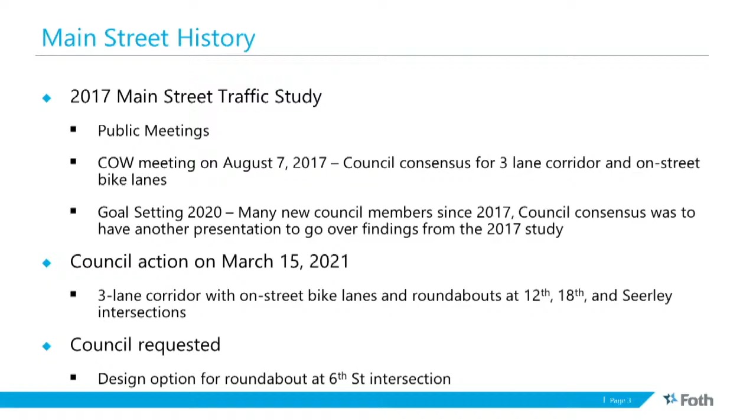A little bit of history: in 2017, the city contracted with a consultant named Snyder and Associates to perform an overall traffic corridor study, basically from 6th Street south to Seerley Boulevard. Part of that process required individual stakeholder meetings with businesses and residents, and we had multiple public informational meetings as well. Ultimately, in August of 2017, we received direction from council to move forward with a 3-lane corridor and on-street bike accommodations.

At goal setting last year, this was a topic of discussion with many new council members since the 2017 presentation. Some of the council consensus was to hear the findings of the report and the information presented at that 2017 meeting.

So this last spring, I had Snyder and Associates come back two different times. The first time was to provide this current council with information from the 2017 study, and out of that presentation there were a few follow-up questions. The consultant then came back on March 15th and provided that information to you folks.

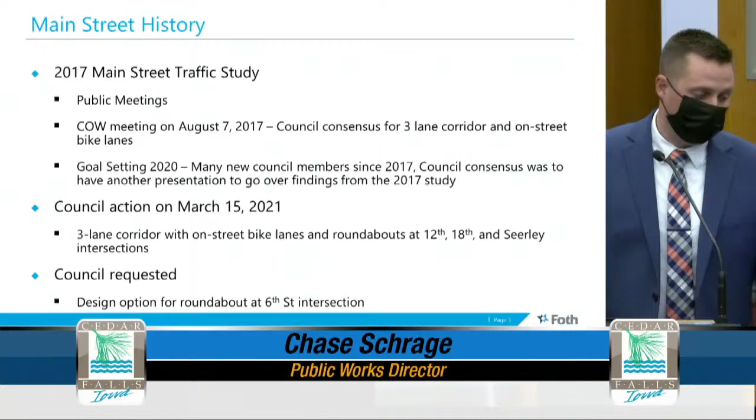Out of the March 15th meeting, staff was left with direction to move forward in design with the 3-lane corridor, on-street bike accommodations, and roundabouts at 12th, 18th, and Seerley. Part of that, council requested a design alternative for the 6th Street intersection, comparing a traffic signal versus a roundabout. With that, Aaron Munzinga is here with Foth Infrastructure to go through those details with you.

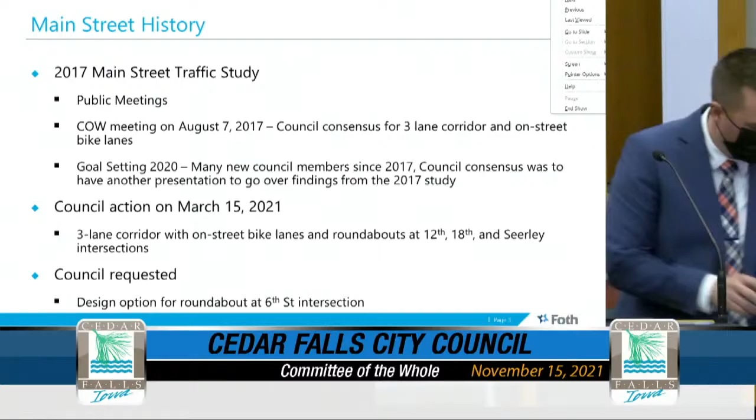Thank you, Mr. Munzinga. The floor is yours. Well, thank you, it's great to be here. I know some of you folks I've met in the past, some I haven't—so this is just what I look like. Appreciate the time here this evening. As Chase said, there are a couple items here we'd like to go through.

The first item, I'll talk a little bit about the intersection there at 6th Street, and then the second item, we'll get into some of the potential right-of-way impacts for the corridor. As Chase said, there's been a lot of work already done on the Main Street corridor, as recently as the last meeting back in March. The next step was for us to come back and look at the design option for a roundabout at the 6th Street intersection, which is what we're going to tackle first.

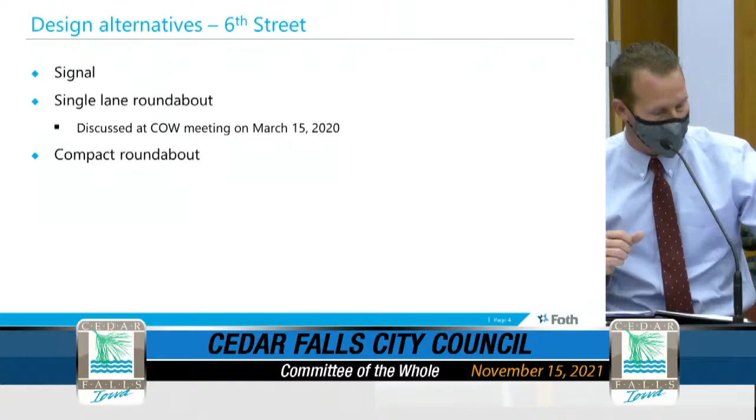One of the options we looked at was a signal, and then we also did a couple different iterations looking at fitting a roundabout into that intersection—finding the best way to do that while balancing feedback from the previous meeting about how much right-of-way disruption a traditional-sized roundabout was causing.

So really, to summarize, the biggest pros with this option are there's really no right-of-way impact and a bit of a smaller footprint in terms of construction limits we need to have. On the flip side, one thing we would need to do with this option is replace the traffic signal itself in addition to just the intersection work.

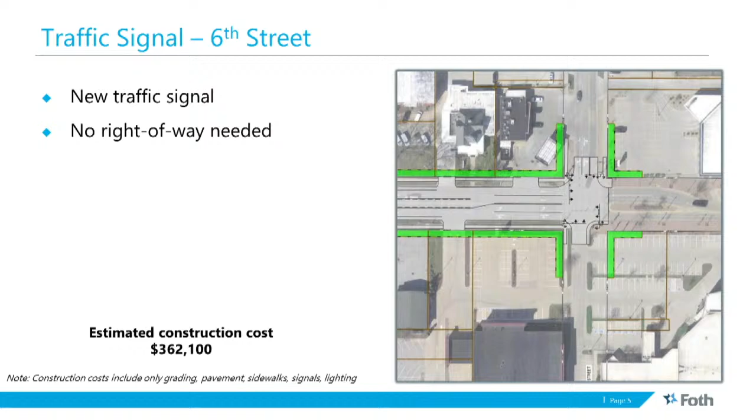So the biggest benefits are the same benefits you have with any roundabout intersection: improved safety and improved traffic operations.

The other element with the roundabout is the impact to the library parking lot and the estimated loss of stalls that option would have. We haven't gotten far enough in our design—there's probably some things we can fine tune—but to be conservative, we're estimating somewhere in the 10 to 13 stall range of potential stalls lost.

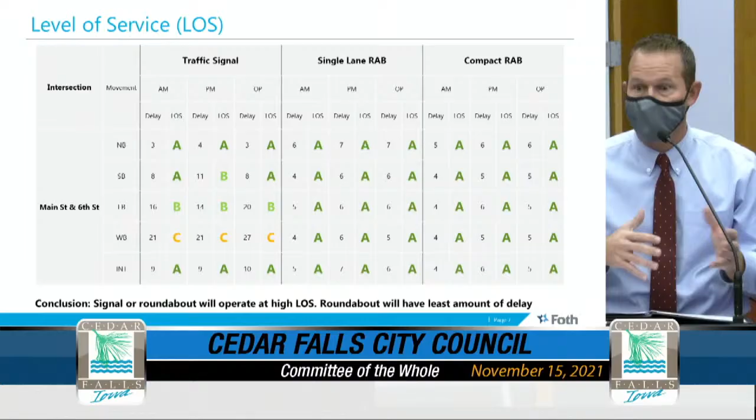The DOT, at a minimum, likes their intersections to operate no lower than a level of service D. In our previous work here at the city, we usually try to keep it at C or higher, for the movements themselves as well as the intersection as a whole. So, whether you did a signal or a roundabout, the traffic is actually going to operate just fine with either option. The roundabout would just operate at a little bit higher level.

You can kind of see that here if you look at the slide, on the far left under the traffic signal, you'll see we have some movements at level of service C and level of service B, whereas from the roundabout option—the one in the middle and the one on the far right, let's focus on the far right since that's the compact design—we're going to have no lower level of service than A with that option.

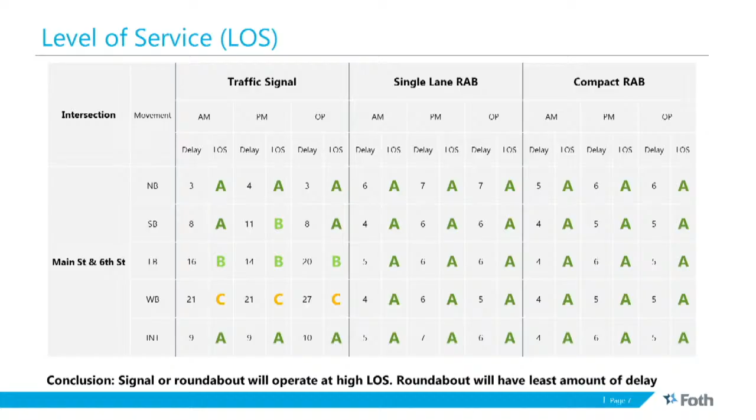So the next thing we can look at is what we call our life cycle cost comparison. To be consistent, this is pretty much the same methodology you folks have seen in some previous work on Main Street, and it's also very similar to what we did on previous projects, more specifically University Avenue.

If you compare the roundabout to the traffic signal—this comparison is on an annual basis, but think of it over the next 20 years, which is the design life we look at for projects like this—essentially what you're going to see is about $146,000 of what we'd call user cost savings for the roundabout compared to the signal. Over the next 20 years, that's a benefit of about $2.9 million for the roundabout.

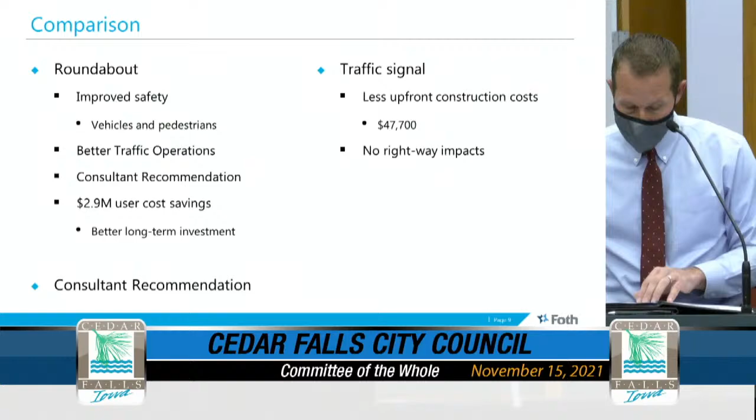So with that, I'd like to pause and see if there are any questions I can address before I tackle the next item on the agenda.

Can you speak about the differences between the larger roundabouts you'd see in other areas versus this smaller one? Are there any additional concerns for crashes or reaction times compared with a larger roundabout? Not in this location, so we feel comfortable. It's just slightly smaller here—to give you a scale, the roundabout you see up there has about a 90-foot diameter. Traditional ones are usually around 100-plus feet, and of course for larger intersections with multiple lanes you get significantly larger, 160 feet, et cetera. In this location, looking at the traffic, we already have low speeds, so it's an ideal location for what we'd call a compact roundabout, a little bit smaller.

Okay, thank you. You're welcome. Other questions from council? Councilor deBuhr?

I never did hear what the accident statistics were for that intersection—can someone tell me what they are? Yeah, actually in the last decade here we've had about one accident per year at this intersection, and of the corridor, it actually has the highest percentage of injury accidents. So you see that reflected in the user cost summary I shared.

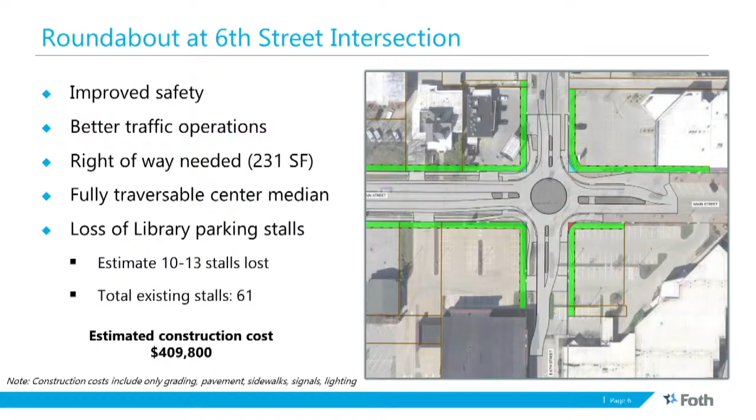Thank you. So I think there was three things, let me address them all. The first was, the green, our temporary easement - the stalls I identified, kind of 10 to 13, are impacted regardless of the temporary easement. Where a lot of that impact comes from is, part of it is just obviously we need a little extra width in there with the roundabout option. And then the other part came in just looking at the circulation here within the library and how folks get in and out of there.

Could the angle parking be an option? Definitely. And let me be clear too, we haven't really gotten into fine tuning this, and I would say that, at least at this stage, we're taking the approach to probably be as conservative as we can. I think it's similar to how we handled University Avenue - we're going to try to identify probably the worst case scenario, and then try to dial that back.

But we do also want to make sure folks know, there's certainly going to be an impact to some stalls. And then the last part of the question, if I caught it, was, in addition to the angle parking, we could also look at sliding that - I know there's some fine tuning we can look at here that could maybe help us save one or two of the stalls. But like I said, we just haven't gotten far enough into design, so I hate to put a number to it until we can move forward with that design, in case that's the way the council wants to progress.

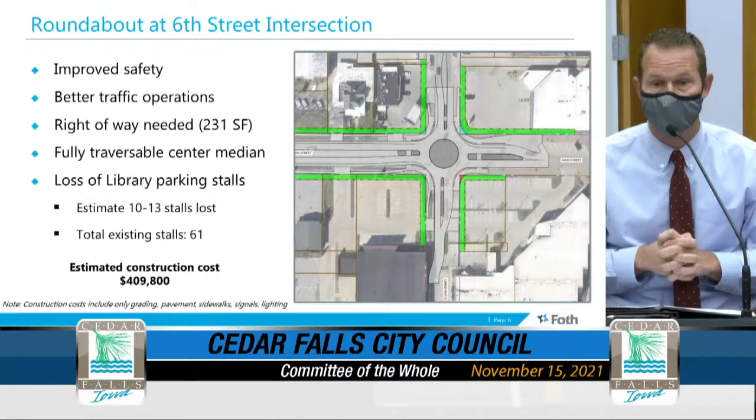So the second part here of our presentation, I'm going to give the council and mayor an overview of the potential right-of-way impacts. Again, this is just looking at our concept. And I just want to make sure everybody's clear - our goal here at this point is to lean towards being a little bit more conservative, knowing that we can always dial things back. So if there's certain areas we're a little unsure about, we've tended to identify that as an impact.

So the first thing is, you'll see a couple different colored areas up there. There's the lighter blue areas you see in the slide deck, and in the information included with the council packet, that shows the areas that are going to be a permanent acquisition, either from a total parcel take or some of the strip takings we need. The green areas, as I mentioned a few minutes ago, is just temporary construction easement. That's something we'll need on both sides of the corridor, all the way up and down, to be able to build the project. But of course, that's not a permanent acquisition.

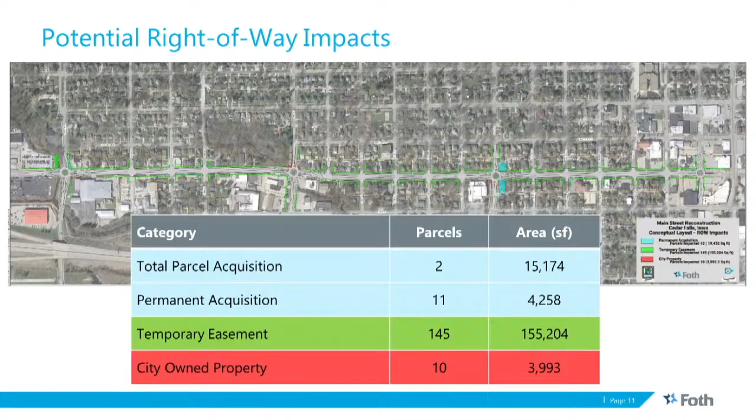So I'm going to start here with 6th Street, and I just want to be clear that we've not made any decision on this intersection, whether it's going to be a signal or a roundabout. I'm just showing the roundabout option because that option has right-of-way impact and the signal does not.

Again, this is a little bit of a repeat, but just to be consistent, when we look at the intersection here itself, you can kind of see that we've got some small right-of-way impacts at 3 of the corners, like we had talked about a few moments ago.

Now, the next area we want to look at is 12th Street, and you folks will probably see a theme here. Our right-of-way impacts are, for the most part, concentrated at the 4 intersections. At the intersection at 12th Street, this is certainly the intersection where we've got the most impact.

You can see that we've got total acquisitions identified for the property in the northwest and northeast quadrants, as well as some smaller strip takings in 2 other parcels here at this intersection. We've tried to take advantage of the city-owned property the best that we can.

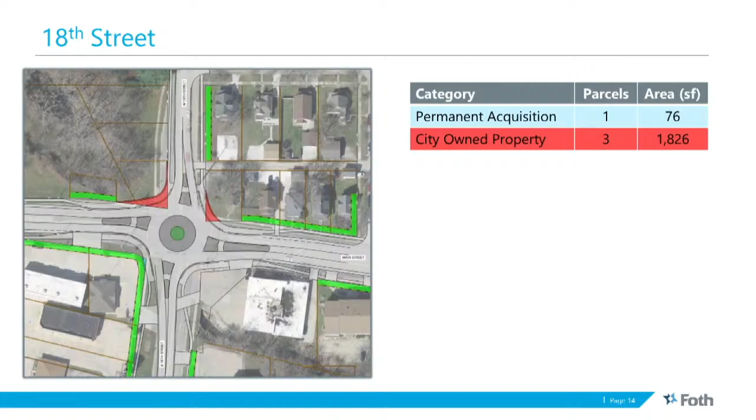Now, this is the only area really outside of the intersections where we need some right-of-way. Between 20th and 21st, as you can see, we just need a strip in here, and really this is going to help infill with the sidewalk going in there. That's primarily what this taking would be for.

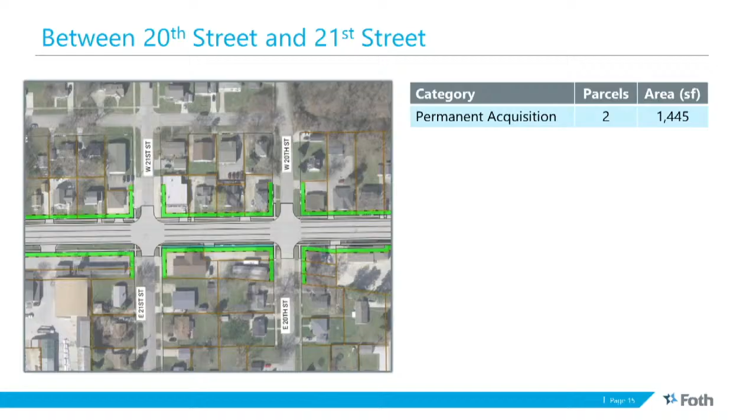And then finally, here at Seerley Boulevard—now, this has some similarities to 12th Street in the sense where we did look at moving this a number of different times. We were trying to balance that impact to the gas station with some of the properties to the south. Right now, we've got this as far south as we think we can.

Again, if we move it any further to the south, we kind of get into that similar situation where we're saving one impact but moving it somewhere else. And the further south we get, it also affects the design of the box culvert, or how we're going to be handling the box culvert in this location.

So to summarize here, the only difference between this slide and the first slide I showed is we did assign some order of magnitude costs to the right-of-way impacts. For the acquisitions, we've just used the valuation currently provided by the county, so just as a starting point.

And then for the strip takings and the temporary easements, we've just used what we'd consider current market rates for those. For the permanent strip takings, we're using $15 a square foot, and for the temporary easements, we're using $1 a square foot. You can see the square footages there for each category, and of course we have not put a dollar amount to the city-owned property.

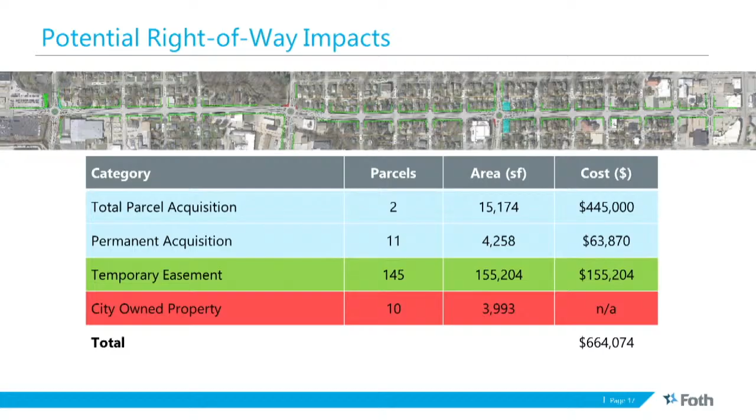So, before I open up for questions, just wanted to give an update here on the schedule. Just a couple things to add, the progress that has been made.

We have submitted the project for a grant from the Traffic Safety Improvement Program through the DOT. That was submitted back in October, and we're supposed to find out sometime towards the end of the year.

We have also walked the corridor, so city staff and I have visited with just about all the business owners along the corridor, to let folks put some faces to names and provide an update on where things are at and where things are going. That's one of the first steps in the public engagement.

As you all know, the city's got some federal funds, with the first round in fiscal year 23. So to meet that schedule, we want to get the project let in December of next year. Working backwards from that, we really want to get going on the right-of-way side of things, since that process can sometimes take longer, usually 8 to 12 months. That's the next step, accelerating that part of the project.

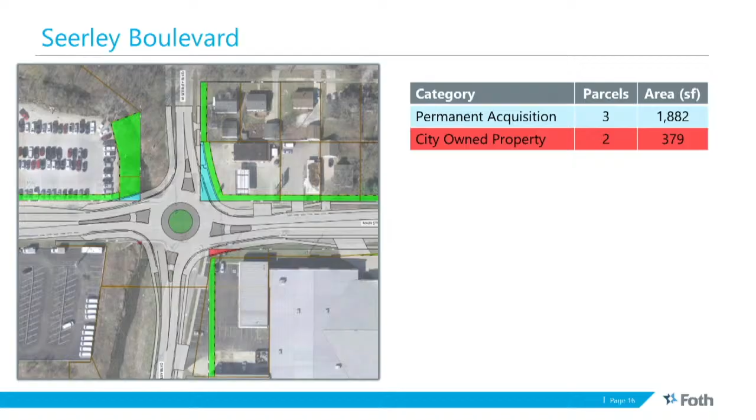Councilor Harding: On the permanent acquisitions on 12th, with the property owners there, do we have any idea—have we talked to them where they're at? No, I have not had any contact with either one of those property owners at this point.

Has staff had any contact with them? No, we haven't at this time, but until we get into the final design and actually know that we need to acquire the property, we hate to move forward in that direction until we know that—we only need a 5-foot permanent easement and don't need the total take.

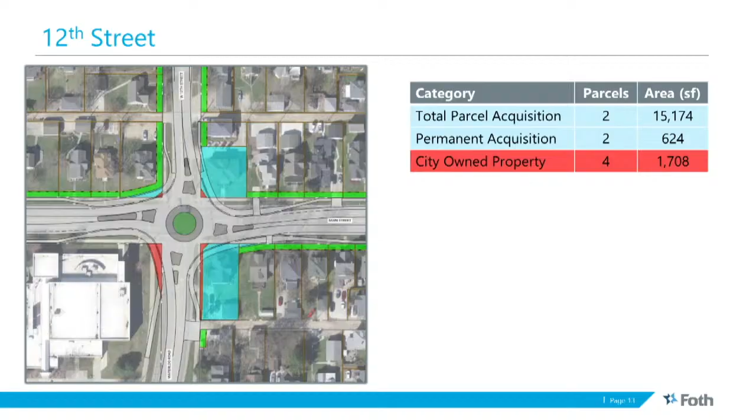So what time frame do you expect to have that information? Coming out of this, we'll really ramp up our final design activities, where we get into the details. You're looking at towards the end of the year, early part of next year, when we'd be able to know exactly where we're looking at for some of these impacts. Okay, thank you.

Councilor Harding: So I understand these are worst-case scenarios right now, which we could try to minimize. But what happens if we move ahead with the roundabout and those property owners don't want to sell? What situation do we find ourselves in if we haven't approached them about telling them it's a possibility? You want me to handle that one? I'm just curious how the process goes.

So in that case, there's what's called condemnation. There's a rigorous process laid out by the federal government that we follow in cases like this—certain steps in terms of communication, and a period of negotiation. But if you got to the point where you couldn't reach a negotiated agreement, then you can go into condemnation, which allows the city to acquire the property, and it becomes a discussion and negotiation about how much that compensation is. We usually do everything we can to avoid that.

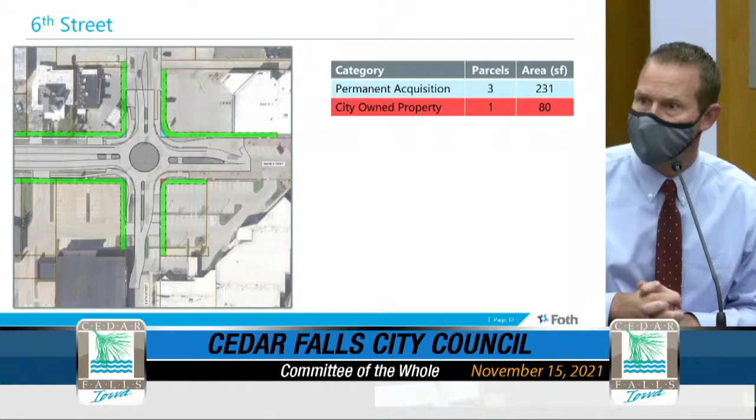Mayor, at 6th Street, have we had any discussions with First National Bank about parking, shared parking, or doing something for overflow at the library there? Have we ever had a conversation with them? I don't love the idea of losing 10 to 13 parking spots down there, but First National Bank, I've rarely seen that parking lot full, so I almost wonder if there's not a more permanent thing that can happen for the library, because the library is consistently full a lot of times, so I wonder if something can be worked out as part of this.

There's a lot of things to look into yet, and I think Aaron alluded to some of them, but there's things like shrinking the length of the median on Main Street north of this intersection to have additional angled parking on Main Street. Those are all things we can look into. If we can add 2 more angled spots on Main Street itself, and then reduce the ones that are impacted, we may get it down to 5 or 6. We don't know until we get into that.

Until you get to final design, sure. Okay, other questions? If there's no more questions, I'd like to make a motion to move forward with the roundabout at 6th. Do we need another motion for the resolution? The resolution will just happen on its own, correct?

So the motion is on the floor for moving ahead with the final design for 6th Street as a roundabout. Is that correct? Is there a second? I'll second. Motion and seconded. Open it for additional discussion.

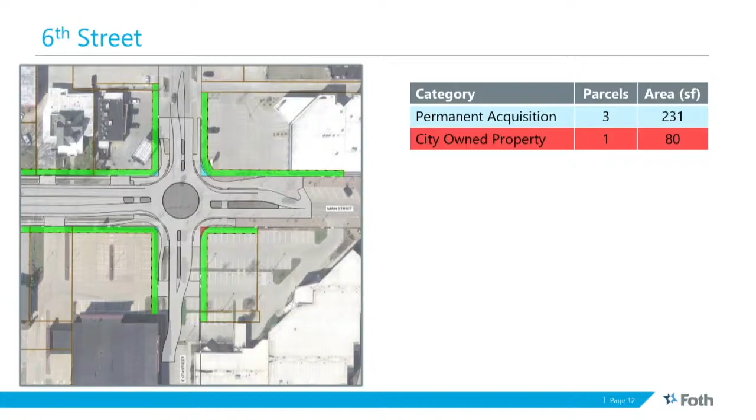Mr. Mayor. Yes, Councilmember Sires. It doesn't seem fair if the city's not willing to give up their parking spots at the library, that we should expect private business to give up theirs. I would rather see the city have the burden. I'm not in favor of this at all, but just to shift it south and put the burden on a private business, I don't think that's right at all.

Any other? Okay, so Councilmember Harding? I'll be brief—I like roundabouts too. I do get concerned that we're just getting a little trigger happy possibly with it, and I don't know if there's a right answer either way, but we're going to see some parking loss, and that's something down there right now that I don't want to see. And it's such a small area—I'm just nervous about trying to force one in there.

Okay, so if no other discussion, then what's on the floor is continuing the design of a roundabout at 6th and Main. If it approves, they will continue that work knowing they need to try to limit the number of impacts. If it doesn't pass, then it'll be designed as a signalized intersection as it is currently, correct? Yep, correct.

So, motion and seconded. All in favor, say aye. Aye. Opposed? Nay. Okay, let's see a show of hands for that. So for aye, 1, 2, 3, and for nay, 1, 2, 3, and 4 with Kruse.